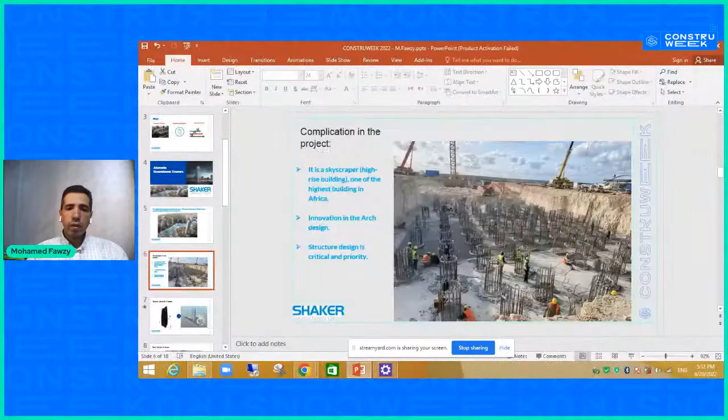So we found that due to some complications in this project, we had to use BIM. First, as it's a skyscraper, the design and construction of this project is more difficult than any ordinary building, especially the structural design. Structural design became a very difficult obstacle in the project because we cannot request penetrations in the beams or reduce the height of the beam for an MEP penetration. I'm going to talk as an MEP consultant because this is our role in this project. So the structure and the design stability of this building was the most important thing in this project.

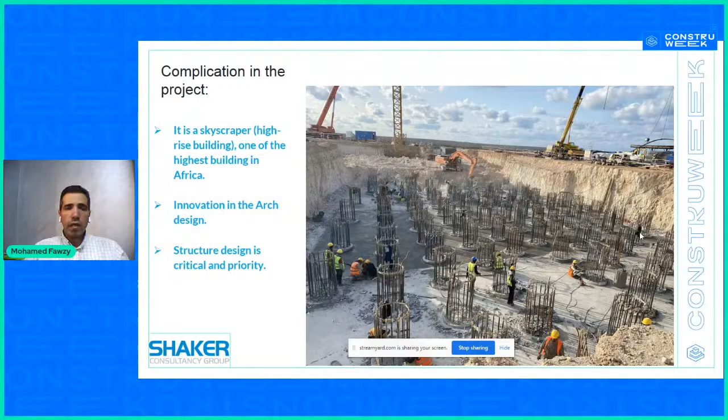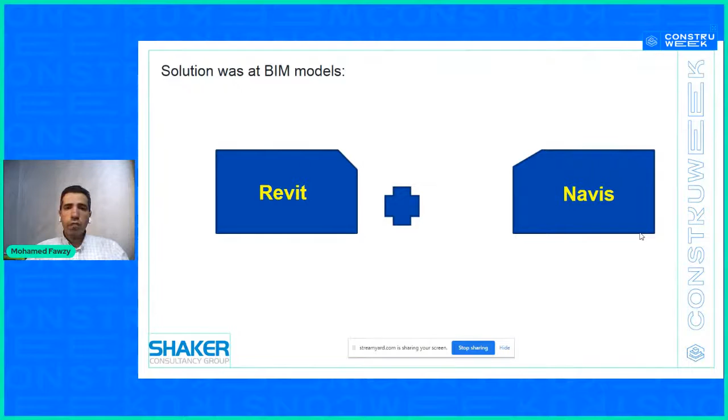So we have to customize and we have to go on with this structure design because it's according to loads and calculation, and we have to manage our electromechanical systems. So what was the solution? The solution was to use BIM technology for this project by BIM software like Revit and Navisworks.

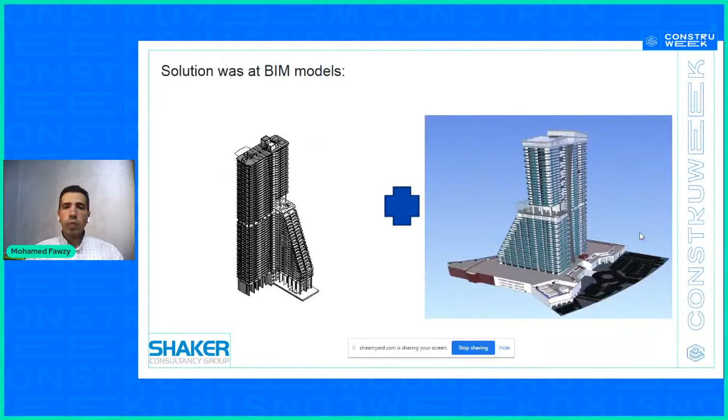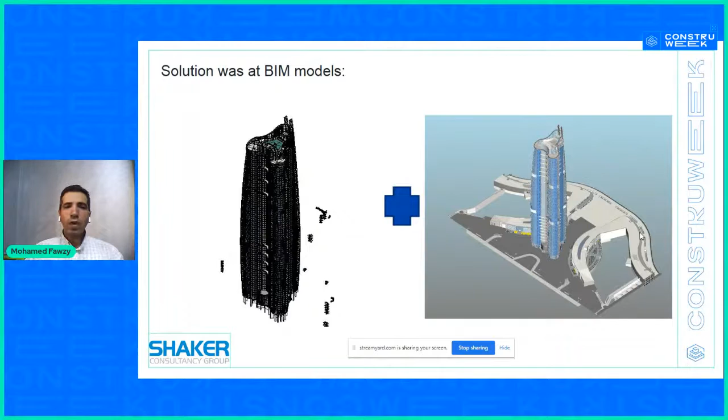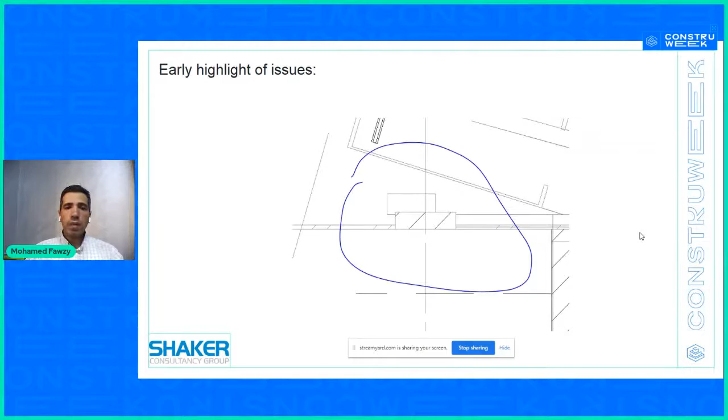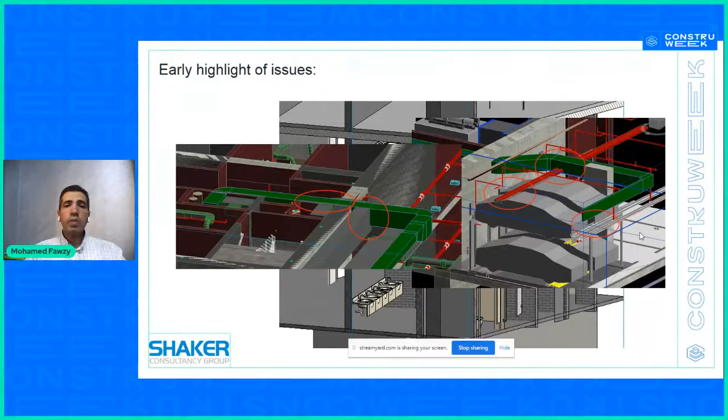We made our design in BIM, in Revit, and we make the check in Navisworks for all towers, whatever it is, for small towers, it will not consider it small, or for the residential, for the iconic tower itself. This helps us to make an early highlight for some issues that may come out due to design mistakes or due to some coordination issues that need to be taken care of before construction, from the design stage, from the beginning.

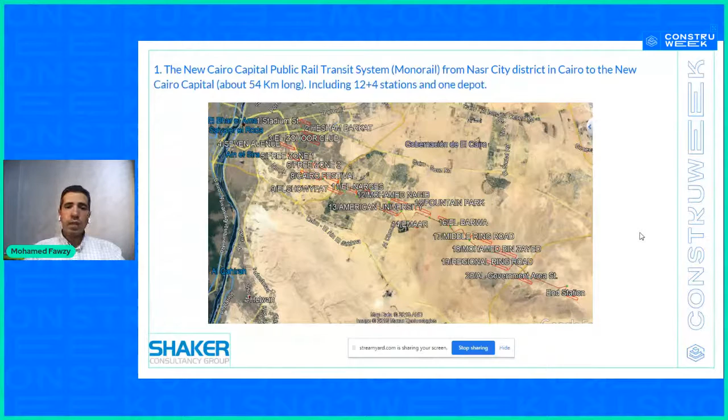The second piece of art that I wanted to share with you is another project which is called the Cairo Monorail. Cairo Monorail consists of 2 lines. The first line starts from Nasr City and it's going through New Cairo capital. It's about 54 kilometers long, including about 16 stations. And the second line goes from Giza city to 6 October city, about 42 kilometers long, and it consists of 22 stations and 1 depot building.

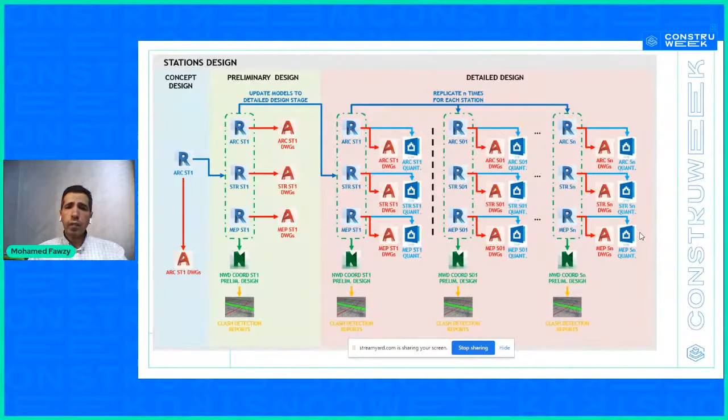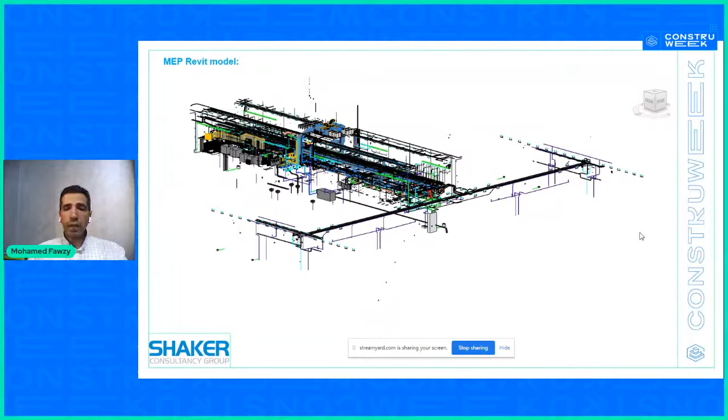We managed to use BIM in all the stages of the design, from the concept to the preliminary and going through the detailed design, by using all the available BIM software like Revit and Navisworks, and for sure AutoCAD also had a part in the process for this project. So there was an architecture Revit model and a structure Revit model, and our part was to create the MEP Revit model. In this project, the architecture and structure designer was a designer from Spain called Sener. So for sure, we have to make more clash tests and checks into our models. So we use Navisworks for the quality assurance and quality control for our model.

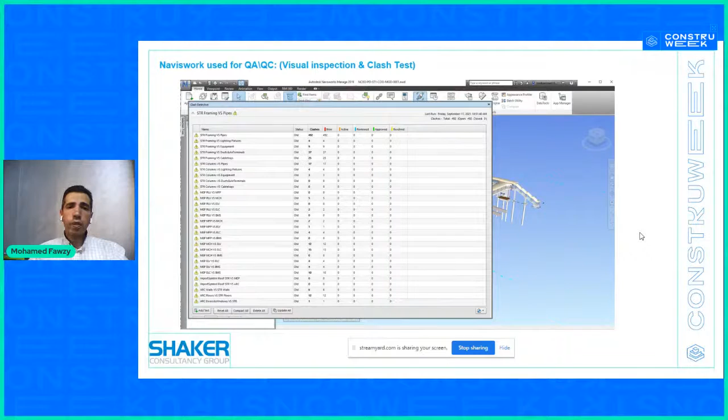Visual inspection is very important and it's very effective in analysis work, not only to make a clash detection and get some clashes and try to solve them. So we use again Navisworks for the design and the analysis work for the quality control and the quality assurance. As I mentioned, the architecture and structure designer was Sener from Spain.

So we have to use also one of the solutions, the cloud solution, which is BIM 360, in order to manage the data, to manage the revisions of the model, and to get benefit of all the features that exist in the cloud solution. This was very important, especially in this project, because some consultants exist in one country and others exist in another country.

Finally, I just want to let you know that now it's not an option, it's mandatory. So all the companies, whether consultant, contractor, or developer, have to manage to use BIM through their company. For sure, implementing BIM may take some time and may have some difficulties, but at the end, we have to use it because the benefits, not only in mega projects but even in medium or small projects, are more than using the traditional way that we used in our old projects.

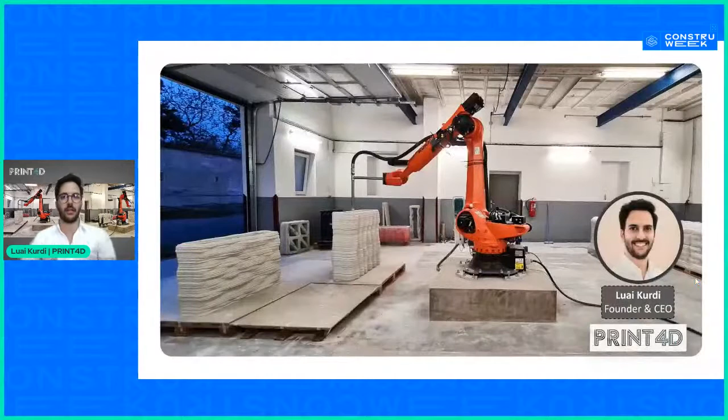Perfect. All right. So today I'll be talking about 3D concrete printing in construction. My name is Luai Kurdi. I'm the founder and CEO at Print4D. We're a 3D concrete printing company. We develop the technology and provide the printers to clients all around the world, where we are working with robotics for construction projects, large-scale 3D concrete printing.

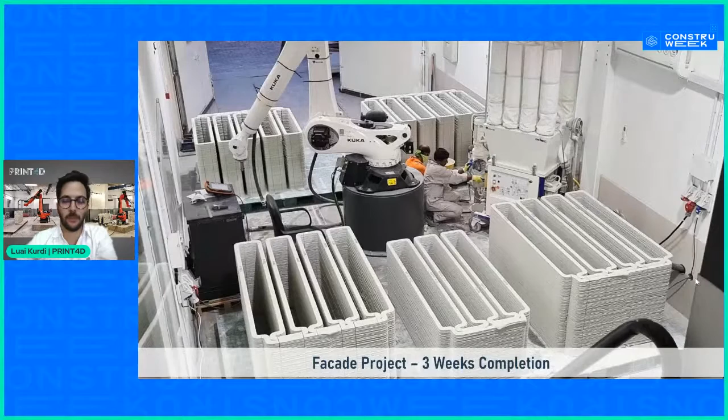So my presentation is going to be mainly about a few case studies where I've worked using this technology, and also some information about 3D concrete printing and different technologies currently being used around the world. With the first case study, I'm going to jump right into the first 3D concrete printed facade in the world. It's located in Dubai, and we managed to print 880 facade panels for these 2 office buildings in Dubai. For each building, it took us around 3 weeks to complete the printing of the 440 unique panels.

So this is how it looks when we are printing the panels. Each panel is around 4 centimeters thick. After we print the panels and they are ready, we basically install them onto the building as a cladding. These panels are mechanically fixed with stainless steel anchors. And all of these projects I did while I was working with B6 back in Dubai.

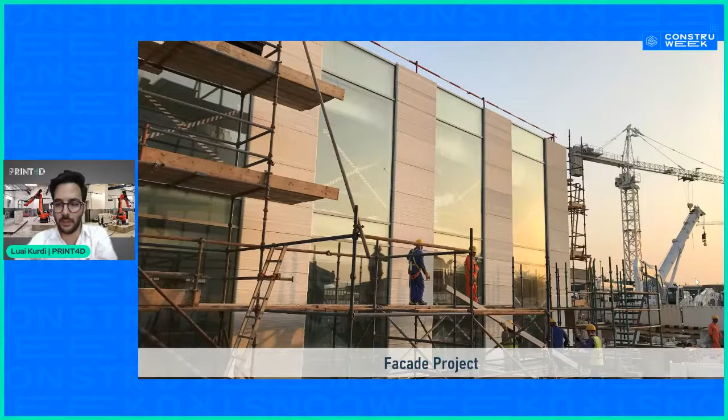So this is how we are able to print in a very short amount of time, 3 weeks for each building, unique panels, different dimensions, different heights and different widths in a very efficient manner, all using a digital workflow. So we don't really have to have any shop drawings or fabrication drawings printed physically. Everything goes straight from the 3D model into the printer and to the code. And this is the second office building where you can see another angle.

Jumping right into the second case study. This is the first fully structural load-bearing building in the UAE, where we did not have to use any steel reinforcement for the walls of the building. This was a 70 square meter building printed in Abu Dhabi on a golf course. Basically it's a kiosk or a shop on the golf course to serve drinks and food for the golfers. Immediately you can see we were able to print the full building from the exterior walls all the way to the interior of the building.

The strategy that we used was prefabricated offsite manufacturing. So basically we printed 78 unique panels or wall modules in Dubai in the factory, and we shipped them to Abu Dhabi, around 1.5 hours in the truck, where we laid them down next to the site and basically started installing piece by piece. So we completed the whole building.

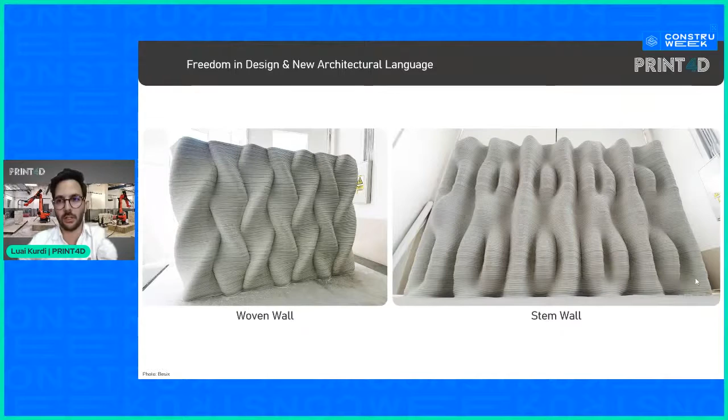The technology that we're currently using is fully digital and also fully automated. It means we design on the 3D model, on the 3D software, and we're able to send the model sliced already and the printing code to the printer itself, and it can run in fully automated mode. So there is no human intervention during the printing, and our role is more a supervisory role where we just check the material, make sure that the printing is going well, and do minor tweaks here and there.

We definitely work with BIM models before we start printing the project to make sure that all of the different disciplines of engineering for the project are well coordinated and we don't have any problems after we start printing the first wall.

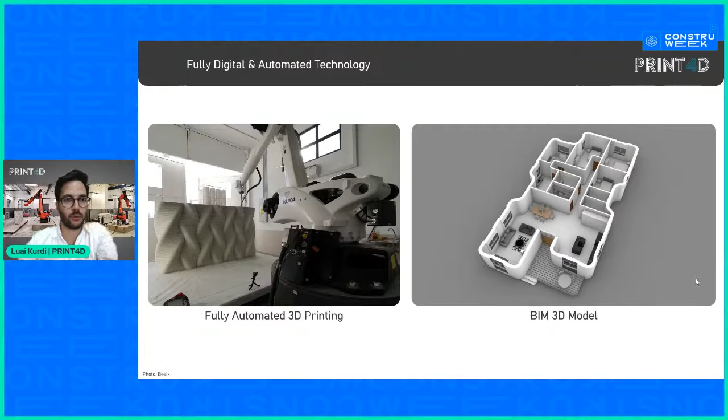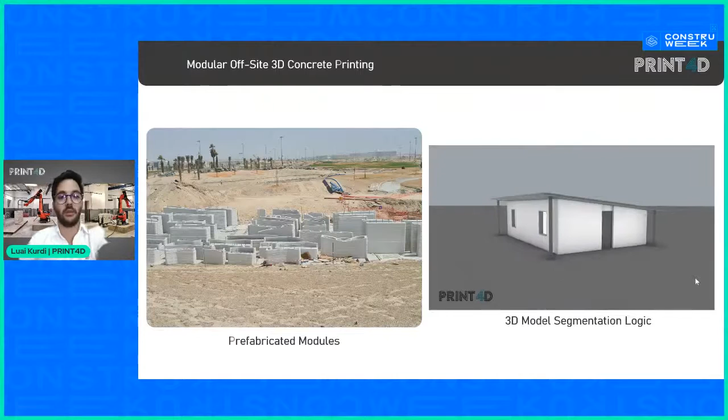After we print all of the modules, we ship the items to the location, and you can see here the video on the right side, which shows you the segmentation logic, where we print the exterior walls separately, the interior walls separately, and then assemble them together. This gives us the ability to have operations running in parallel, both in the factory printing and on-site, for example, in preparation of the slab foundation where the walls will all be assembled.

And here you can see on the right photo, although we're following an additive manufacturing approach, which means we're printing layer by layer, all of our layers are monolithic in a solid structure during this process. And this is how the assembled building looked. You can see all of the printed layers even on the final finish.

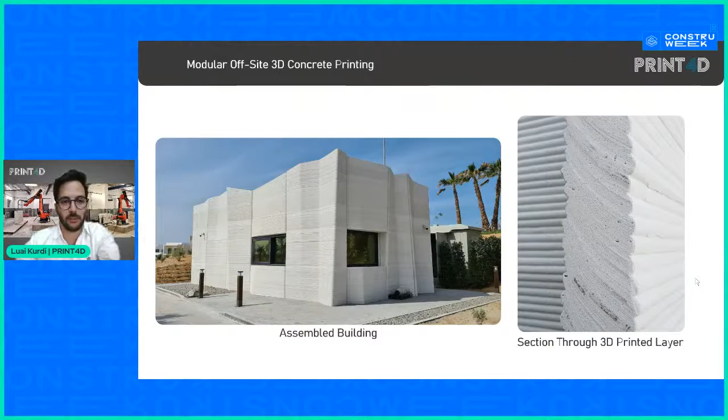And going into the architecture and features and the solution of this technology. So here, as I mentioned before, we didn't use any steel reinforcement. It means that all of the printed walls are load-bearing elements. And you can see the different architectural features. So we don't have any vertical surfaces. All of the facade surfaces are inclined in different angles. And this is one of the features that the technology gives us the opportunity to do.

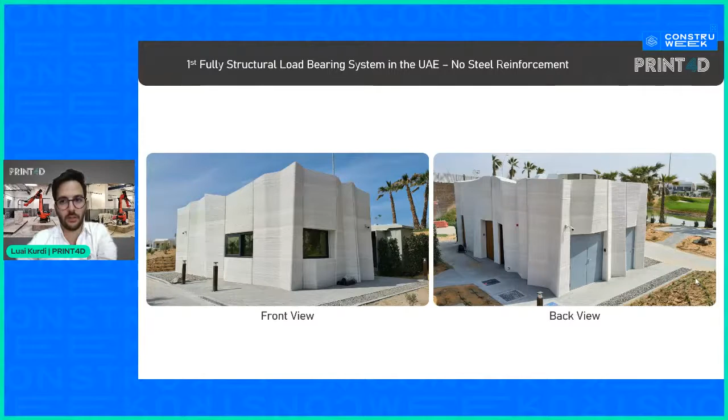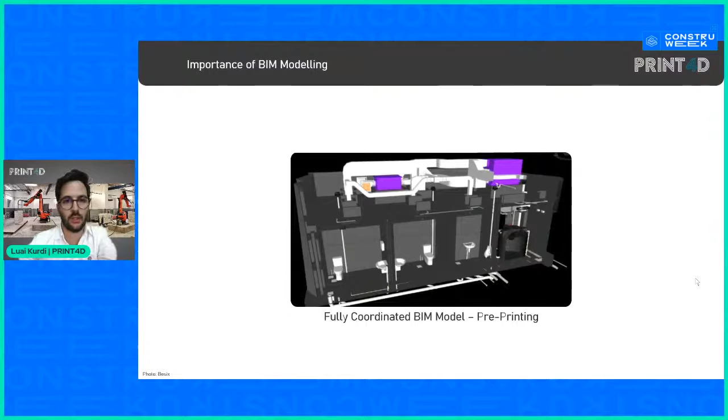And in addition, here you can see the fully coordinated BIM model that we have prepared before we start printing, where we understand how the utilities and services are well fitted within the printed walls, and we can make sure that we are having a clash-free project.

So this gives us a new way of building. Basically, we are introducing a complete building block from the most exterior part of the building, where it can become an artistic facade instead of just a cladding element, all the way to the interior of the building, as you can see in the right photo.

So here you can see the exterior facade. We have an insulation cavity behind it where we're able to put insulation, for example, and then we have a structural infill, and then you have the interior wall. All of this can be printed at once, definitely modeled and engineered using the software. And once we start printing,

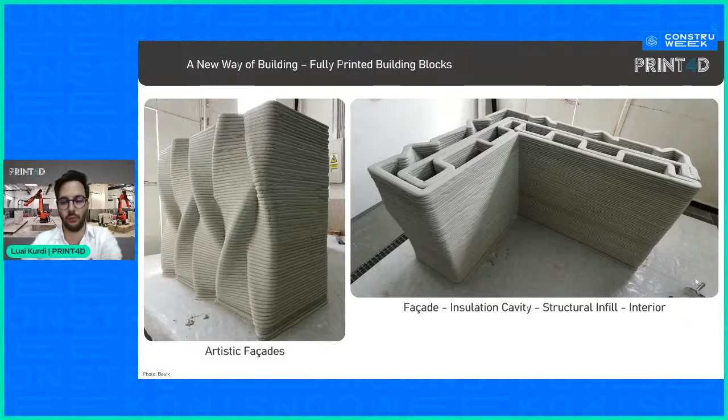this element took around 2 hours to print, and overnight it cures, and we were able to transfer it into the storage location. So this accelerates the building process because you don't need to do the cladding separately. You don't need to make a formwork for the installation. You have a full building block ready for installation on the project site.

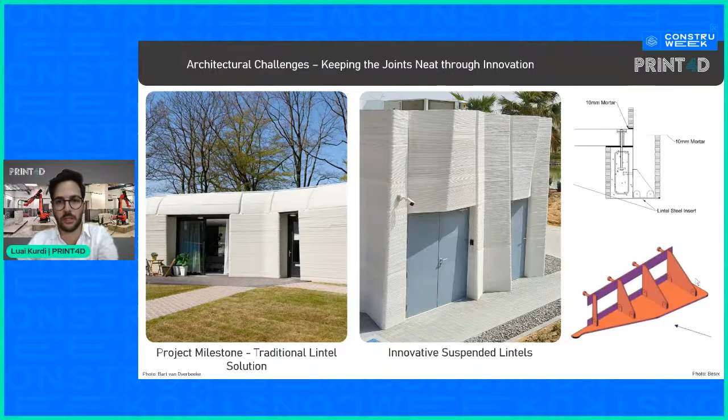As I mentioned before, all of the exterior walls, you can see the different inclination angles, so we don't have any vertical walls. And this is basically what we try to do in this project, is utilize the technology to the fullest capacity.

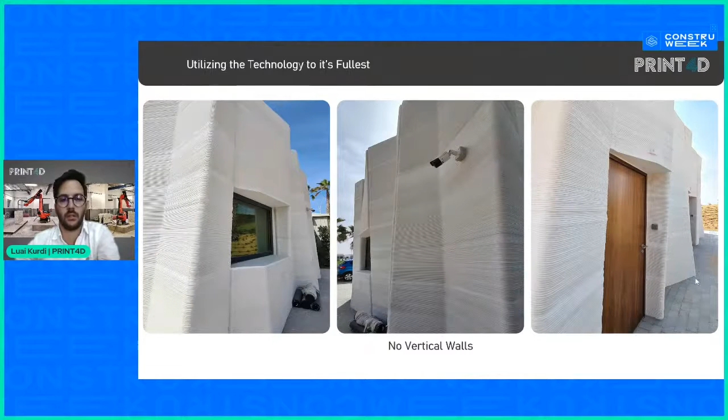Going into a little bit of the speed of the construction. So this project took us 3 weeks to print and around 4 weeks to assemble and finish. We did not have to do any additional finishing or plastering, both on the exterior or the interior walls.

We had the work on site and the off-site in parallel, and we only needed a small team on site, basically to lift the elements and install them on top of each other and next to each other. And then finally, we only have a small footprint on site and minimal equipment, which basically means that you don't have to have a big team on the site to get your construction project finished.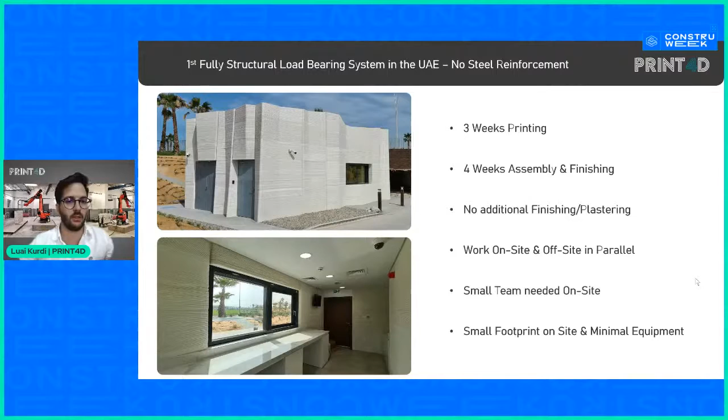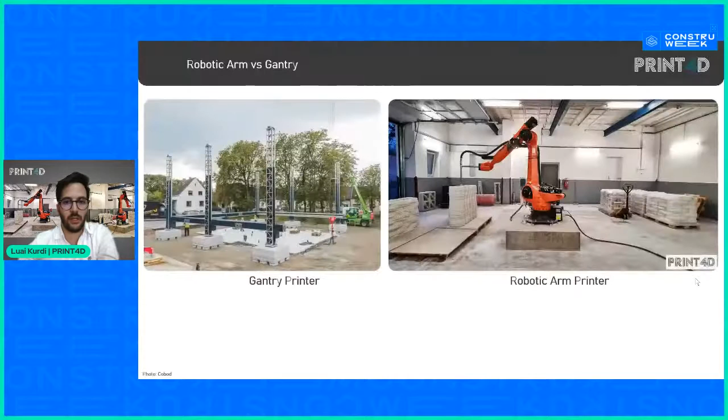Now I'll jump a little bit to talking about the different technologies currently being used in the market, where we are using the robotic arm for printing, and there is also a gantry printer. So on the right-hand side, this is our printing facility in Czech Republic, where we're using a robotic arm to print. And on the left-hand side, you can see the COBOD gantry printer installed on site and printing projects on site.

To compare both technologies, the robotic arm 3D printer is fixed in a location in a printing factory, and we don't have any downtime because we are printing in a fixed location, the printer is not moving, and it doesn't need to be installed and set up every time. However, the same cannot be said about the gantry printer, where the printer needs to be transported, installed, assembled, calibrated, disassembled after the project is finished, and the whole cycle over and over. So you have a little bit of downtime.

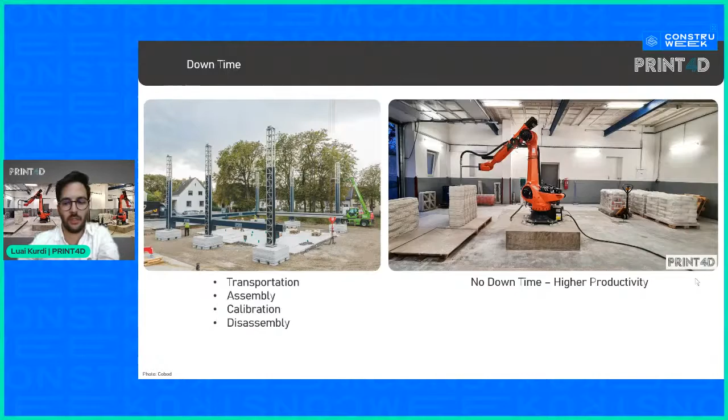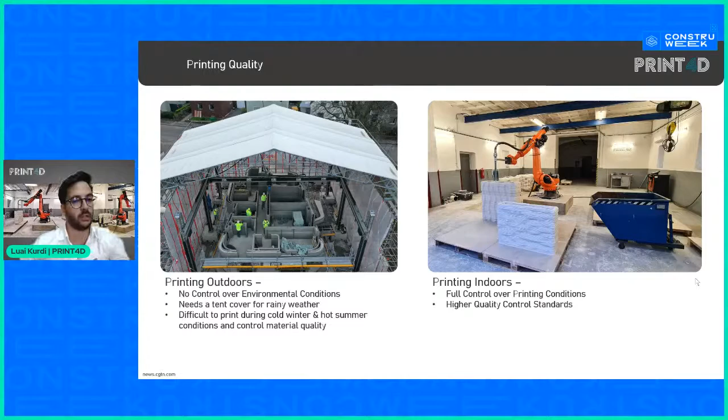Also, we are printing indoors inside the factory, so we can make sure that we have full control over the printing conditions, the environment, and have very high quality control standards. But the problem is printing on site, you rarely have full control over all of the aspects, especially the environment, and especially in cold and rainy conditions, where it can become a little bit challenging. So printing on site is a very exciting and great achievement, but unfortunately, in hot or cold climates, it proves to be a bit challenging.

In addition, there are some differences in terms of the quality and the print resolution that you're able to produce. With the robotic arm, you're able to produce with a print accuracy of plus or minus 0.05 millimeter, and you can really create intricate and fine details. Whereas with the gantry, because the weight of the nozzle is heavy and the overall system is quite big, it's very difficult to create fine details and produce very good finishing. In most cases, these walls have to be finished with plastering to hide the imperfections.

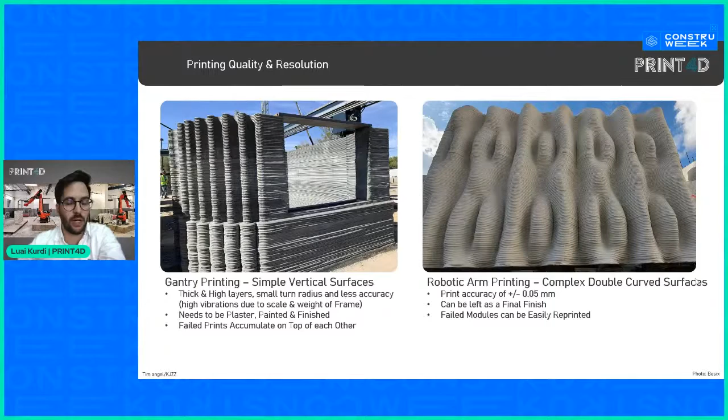So how do we compare 3D concrete printing with traditional concrete construction? Today, the material is proprietary for 3D printing, which means it's been specifically developed for this technology, and that makes it a bit more expensive. Today, the market range is between 6 to 8 times more expensive than normal concrete. But at the same time, there are some exciting developments where some companies are using normal concrete, which comes to a very similar price as traditional mixes.

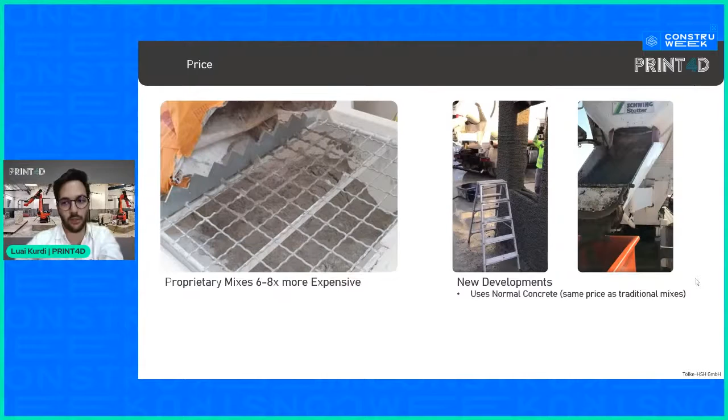In terms of speed and time, traditional methods are quite time consuming. You're having to build one block at a time. You need a large construction team, and there is room for human error, of course. But with our robotic technology printing concrete, we are typically 6 times faster than traditional concrete manufacturing. We have a continuous printing technology. On average, we're printing 15 centimeters per second, and we have very short lead times from producing the design on our software to initiating the printing process. We also don't produce any errors, and we only need a single printer, not a full team.

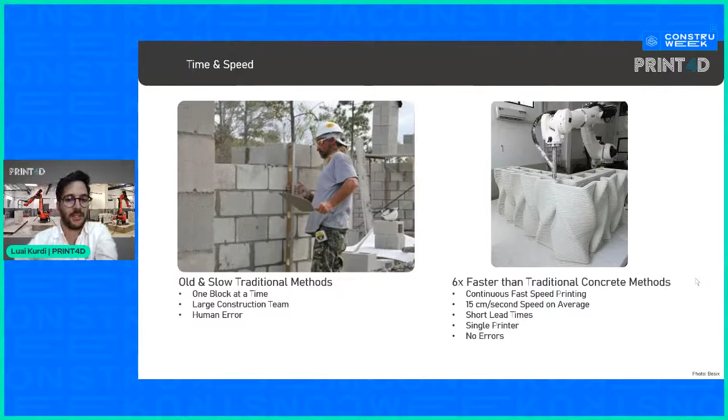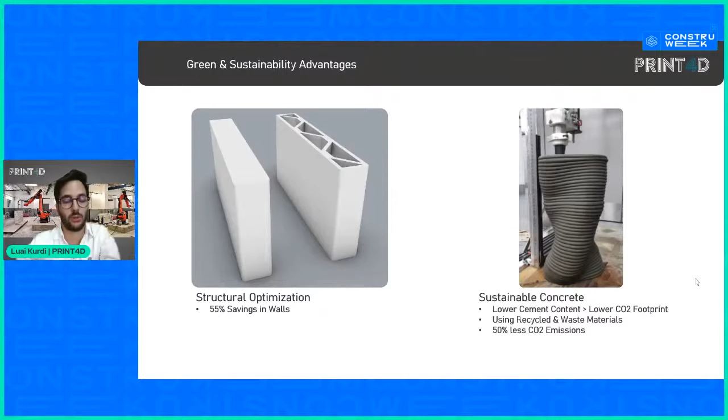When it comes to sustainability, because we are able to optimize our walls, as you can see on the left-hand photo, we don't need to have the wall full of concrete, but only print the concrete where it's needed. We're able to save around 55% of the concrete in the wall elements. As well, in the concrete mix, we're able to use lower cement content, which in turn reduces the CO2 footprint. And we are testing with recycled and waste materials for the concrete mix. We're producing 50% less CO2 emissions, and this is only a small number that will grow, and we'll produce less CO2 emissions as time goes by.

Sometimes it's a bit difficult to compare the traditional approach with the 3D concrete printing approach, and I call it the direct comparison problem. With the traditional approach, you have repetitive labor expenses. You have to hire your labor every single time you want to produce a project. You have a lot of construction mistakes, so sometimes a small detail needs to be repeated twice or even 3 times. And your construction team needs supervision.

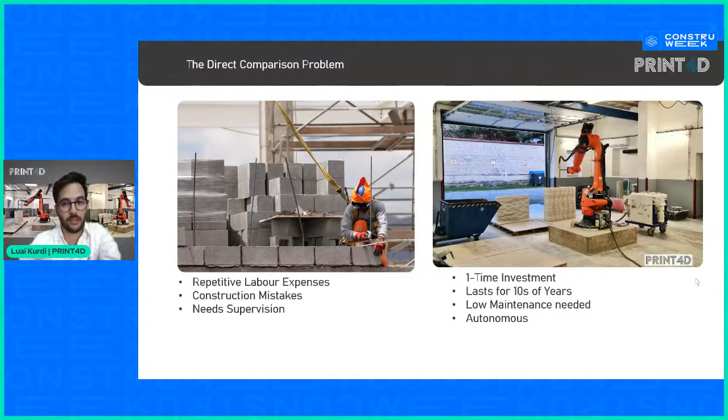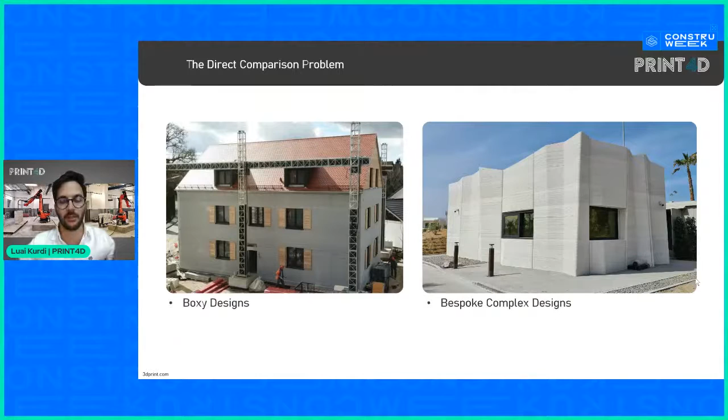But with 3D concrete printing technology, it's a one-time investment. The hardware can last for tens of years with very low maintenance, and it's an autonomous process. We really start to take advantage of this technology when we move away from boxy designs and create new kinds of architecture that fully benefit from the technology, because traditional construction methods will not be able to produce it competitively enough.

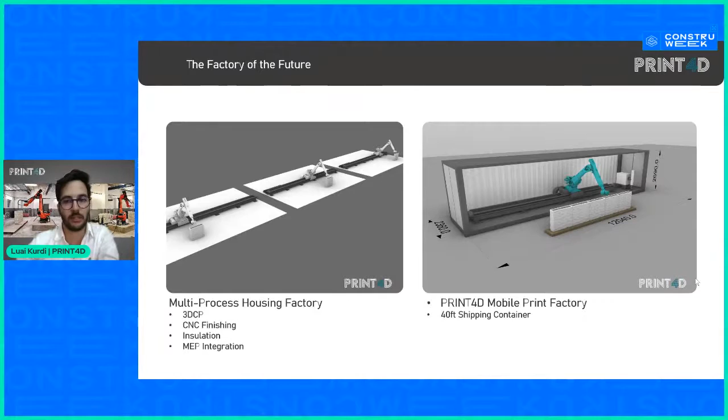On the last slide, I'm going to mention a little bit about our future plans. We're currently working on what we call the factory of the future, where we plan to install multiple robotic arm units for various processes of the housing projects. For example, 3D concrete printing is one of them. We will also be able to do CNC finishing to produce smoother wall finishes, use robotics to insert the insulation into the walls, and check for the MEP integration. At the same time, we're working on mobile print factories, where you can ship a 40-foot container to various job sites and print directly on site.